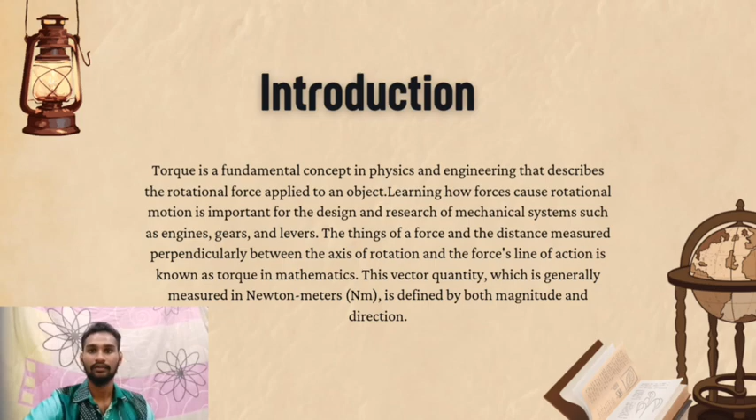Introduction of torque. Torque is a fundamental concept in physics and engineering that describes the rotational force applied to an object. Learning how forces cause rotational motion is important for the design and research of mechanical systems such as engines, gears, and levers. The product of a force and the distance measured perpendicularly between the axis of rotation and the force's line of action is known as torque in mathematics. This vector quantity, which is generally measured in Newton meters, is defined by both magnitude and direction.

The history of torque. The concept of torque has its roots in ancient mechanics and physics, where early thinkers studied levers and rotational systems. The first is ancient foundations. The principle of torque can be traced back to Archimedes of Syracuse, circa 287 to 212 BCE, who formulated the law of the lever. His work laid the groundwork for understanding the relationship between force and rotational motion. Archimedes' insights on the balance of forces on a lever were among the earliest contributions to the study of torque.

The second is medieval and Renaissance developments. During the Middle Ages and Renaissance, scholars like Galileo Galilei expanded on these principles, exploring the dynamics of rotating systems. Galileo's experiments in the 16th century provided a more comprehensive understanding of motion and force, indirectly contributing to the modern concept of torque. The last is modern physics.

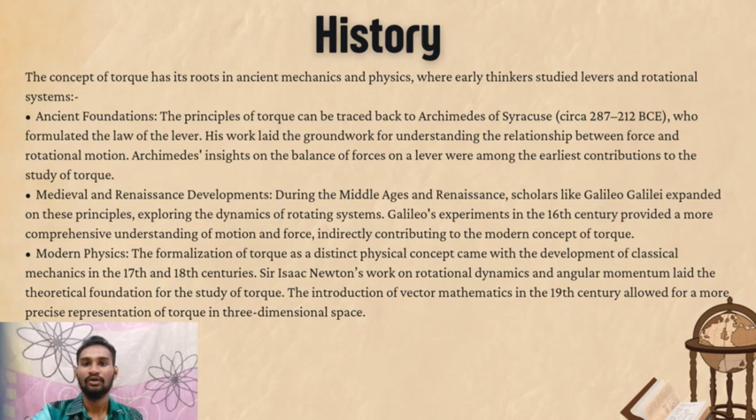The formalization of torque as a distinct physical concept came with the development of classical mechanics in the 17th and 18th centuries. Sir Isaac Newton's work on rotational dynamics and angular momentum laid the theoretical foundation for the study of torque. Next is the background of torque.

Torque has become a cornerstone in engineering and technology due to its wide range of applications. First is automotive engineering. When designing engines and transmission systems, torque is essential. It assesses a car's capacity to carry out operations like towing and acceleration.

Second is structural mechanics. Engineers can make sure that buildings like towers and bridges are stable when subjected to bending or rotating forces by using torque evaluation. The third is industrial machinery. Torque is necessary in the operations of machines like turbines, gearboxes, and robotic arms, where rotational movement is key to functionality. And the last is everyday tools.

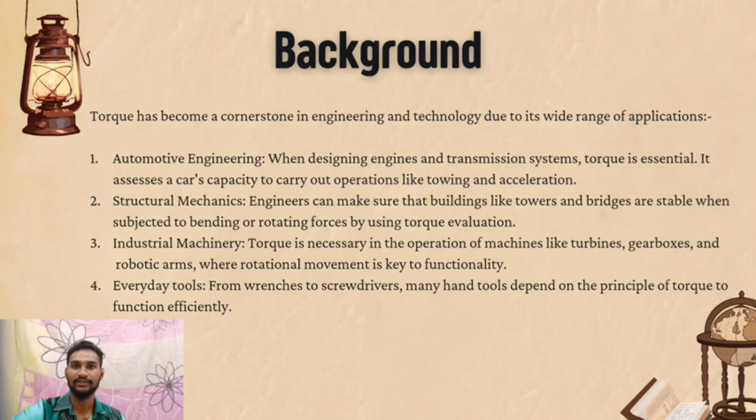From wrenches to screwdrivers, many hand tools depend on the principle of torque to function efficiently. Definition of torque. Torque, often referred to as the moment of force, is a measure of rotational force that causes an object to rotate around an axis or pivot point.

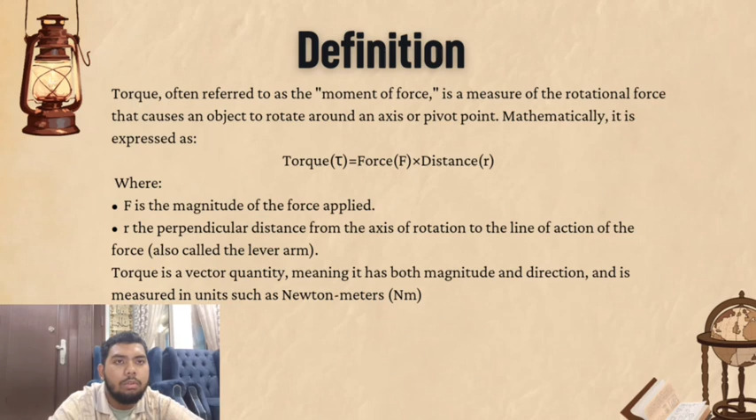Mathematically, it is expressed as torque equals force times distance, where force is the magnitude of the force applied, and r is the perpendicular distance from the axis of rotation to the line of action of the force, also called the lever arm. Torque is a vector quantity, meaning it has both magnitude and direction.

And is measured in units such as Newton meter. Why torque is important is because torque is critical in understanding and designing systems involving rotational motion. Its importance can be summarized as follows.

Rotational motion. The way force drives objects to rotate is explained by torque. Angular acceleration, which is required to the functioning of wheels, gears, and several other systems, would not be possible without torque. Mechanical advantage. Torque is a key principle in levers and other simple machines. By increasing the distance, or lever arm, a smaller force can create a larger rotational effect, making tasks easier to perform.

Next is automotive and machinery design. Torque controls an engine's power production and its capacity to accelerate or move loads in automobiles. It controls the effectiveness and operation of parts like gears and pulleys in machinery.

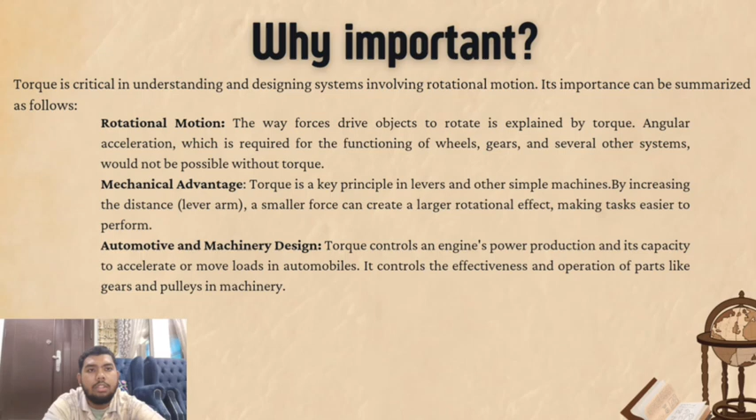Structural stability. Because of torque inspection, buildings, bridges and other structures are harder to get damaged by rotating forces caused by external pressures like wind or earthquakes.

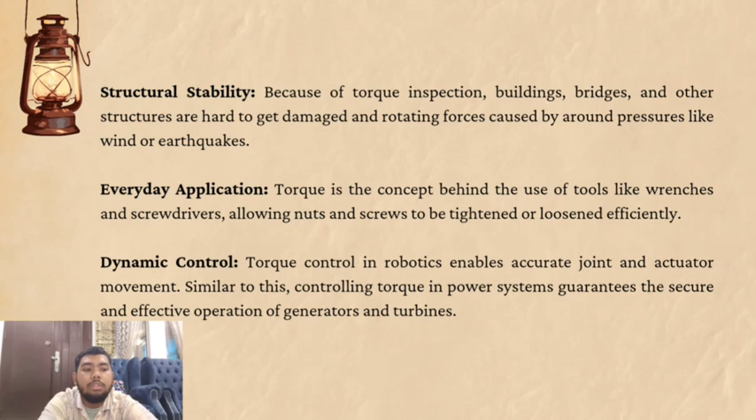Next is everyday application. Torque is the concept behind the use of tools like wrenches and screwdrivers, allowing nuts and screws to be tightened and loosened efficiently. Lastly is dynamic control. Torque control in robotics enables accurate joint and actuator movement. Similar to this, controlling torque in power systems guarantees the secure and effective operation of generators and turbines.

How does torque work? Torque works by applying a force at a certain distance from a pivot or axis of rotation, causing an object to rotate. The effectiveness of the force in generating rotation depends on three key factors.

First, force magnitude. Assuming all other variables stay the same, the torque produced increases with the amount of force applied. Second is lever arm length. The lever arm is the distance measured perpendicularly between the force's line of action and the axis of rotation. The torque generated for the same force is increased with a longer lever arm.

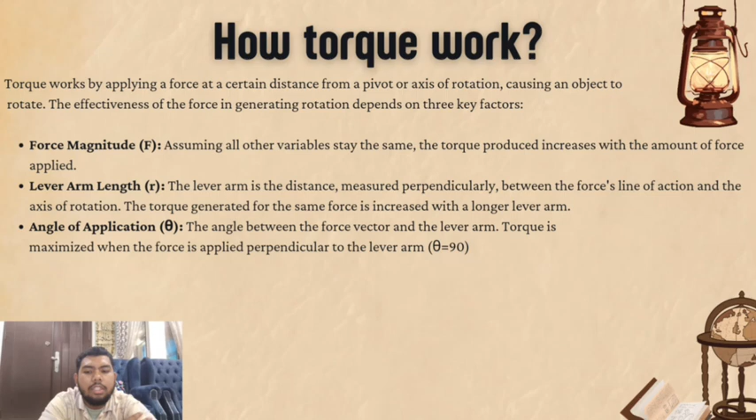Lastly, angle of application. The angle between the force vector and the lever arm. Torque is maximized when the force is applied perpendicular to the lever arm. What is the function of torque?

Inducing rotational motion. Torque is the driving force behind the object rotation. For example, when you turn a doorknob or pedal a bicycle, torque causes the motion. Next is balancing systems. In order to maintain stability, torque might sometimes work in opposition. Equal and opposing torque on both sides of a seesaw guarantees system balance.

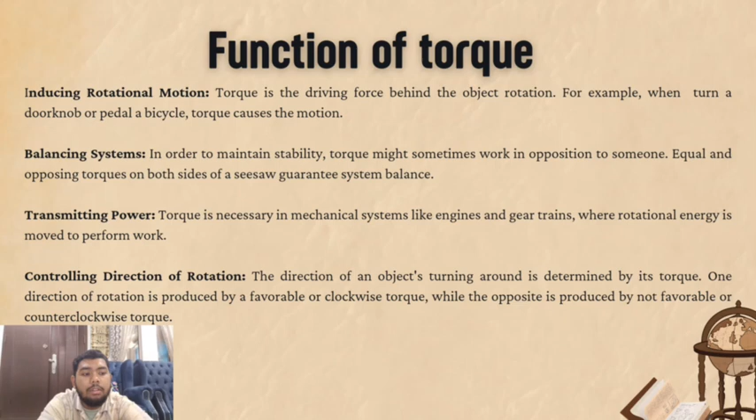Transmitting power. Torque is necessary in mechanical systems like engines and gear trains, where rotational energy is moved to perform work. Controlling direction of rotation. The direction of an object turning around is determined by its torque. One direction of rotation is produced by favorable or clockwise torque, while the opposite is produced by not favorable or counterclockwise torque.

Purpose of torque. First, powering machines and vehicles. To move a car or turn a drill bit, for example, torque is employed in engines and motors to create and transfer rotational energy. Second is enhancing efficiency. Systems can apply force more efficiently by modifying the torque mechanical advantage, such as the use of gears or pulleys.

Third, stabilizing structures. Torque calculations ensure a bridge, tower and other structures can resist twisting forces, providing stability under various loads. Fourth, precision and control. Controlled torque application enables accurate force application and movement in automated systems in robotics and manufacturing.

Human interaction with tools. Torque enables tools like wrenches, screwdrivers and levers to function effectively, allowing humans to amplify force and complete tasks with less effort. That's about the purpose of torque.

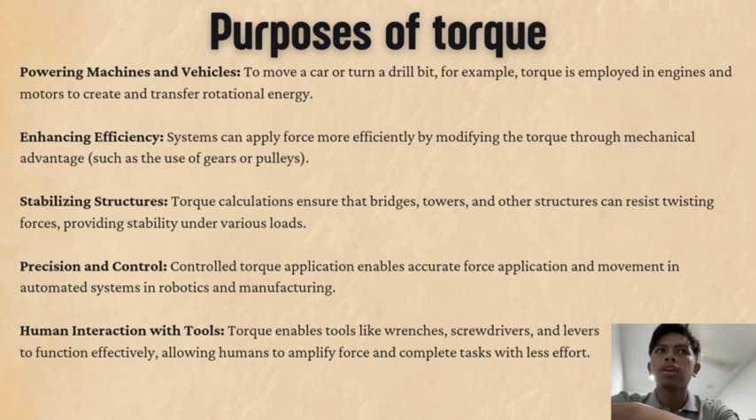Second, we talk about advantages and disadvantages of torque. First advantage, efficient power transmission. Torque enables the transfer of rotational energy in machines and vehicles, making it an essential part of mechanical systems such as gearboxes, turbines and engines. Second is mechanical advantage. Torque enables users to increase force with instruments like levers and wrenches, making things easier, such as lifting heavy goods or tightening bolts.

Third is versatility. Torque is applicable in a variety of industries, from manufacturing, robotics, automotive, and aerospace, displaying its adaptability in meeting a range of mechanical requirements. Next, precision control. In robotic and automated systems, torque control enables precise movement and action essential for tasks requiring accuracy.

Next, structural stability. Torque analysis helps engineers design stable structures that can resist twisting and torsional forces, ensuring safety and durability. Next advantage, optimized performance in vehicles. Torque is crucial for vehicle performance. It defines driving dynamics, braking capacity and acceleration.

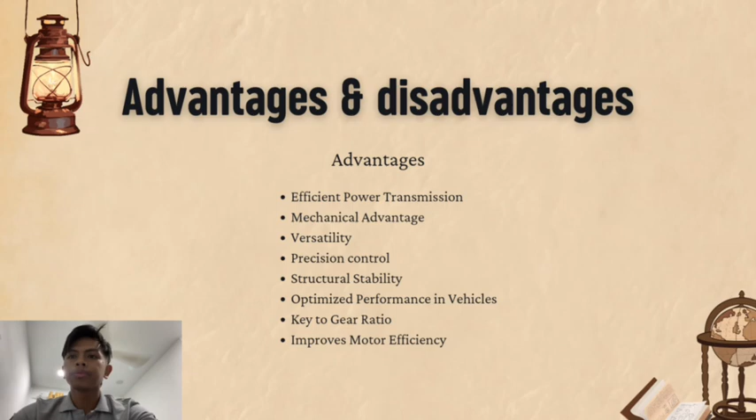Next, we talk about disadvantages of torque. First disadvantage is complex calculation. Numerous elements such as force, direction, lever arm length, and angle must be taken into account in order to calculate torque accurately. This can make analysis more difficult. Second, potential for overload. If applied incorrectly, excessive torque can result in mechanical failure, including stripped threads, bent shafts, or broken components.

Third is energy losses. In mechanical systems, torque transmission often involves friction, leading to energy loss and reduced efficiency. Next is difficulty in measurement. To measure torque in dynamic systems such as spinning machinery of automobiles, specialized instruments like torque meters are required, and they can be expensive.

Next is design challenges. In order to manage applied force, torque consideration in design requires precise material selection and geometry modification, which can raise complexity and cost. Next is misapplication risk. When fasteners are over-tightened or under-tightened, wrong torque application can result in damage to the structure internally.

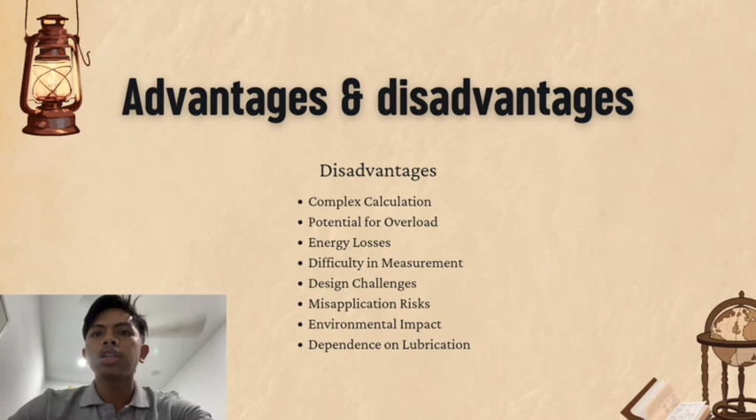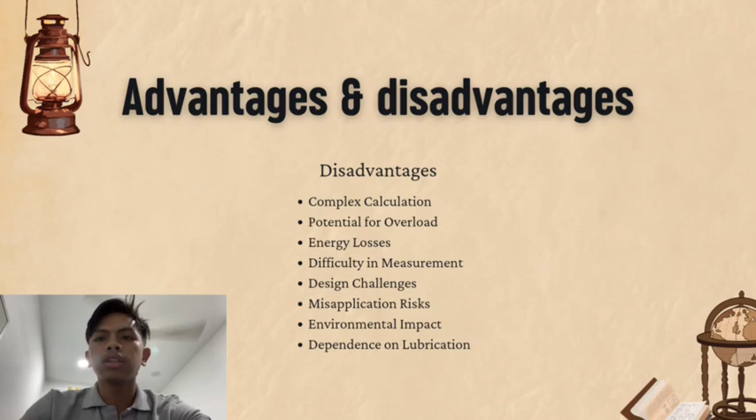Next is environmental impact. Torque transmission in internal combustion engines contributes to fuel consumption and emissions, impacting the environment negatively. The last is dependence on lubrication. Torque transmission systems often rely on lubrication to minimize friction and wear, introducing additional environmental and maintenance issues. So that's about the disadvantages and advantages of torque.

And in conclusion, torque is a fundamental concept in physics and engineering that governs rotational motion and plays an indispensable role in mechanical systems because it displays how successfully a force causes an object to rotate around an axis. It is important for designing and constructing tools, machines, vehicles and structures.

The ability of torque to enable power transfer, enable mechanical advantage and provide accurate control are some of the advantages. It is essential for applications ranging from everyday tools to complex machinery in industries like robotics, aerospace, and automotive. However, torque has disadvantages as well, such as a potential for overloading, computational complexity, and energy losses. Engineers and consumers may optimize torque's advantages and reduce its drawbacks.